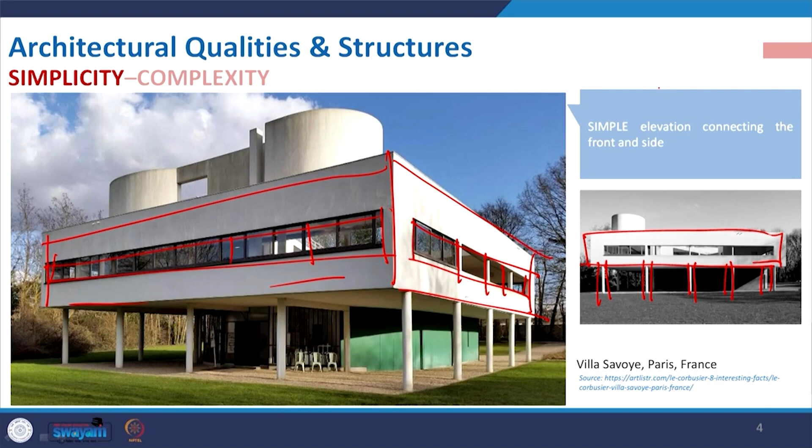Going back to the earlier picture, this is one example, not a very high rise structure, it's like a 2-story structure, where you maintain the simplicity in quality with similar elevational treatment from the front and all the sides. Here we have seen a high rise building, but with vertical and horizontal lines, it creates a simplicity quality of architecture.

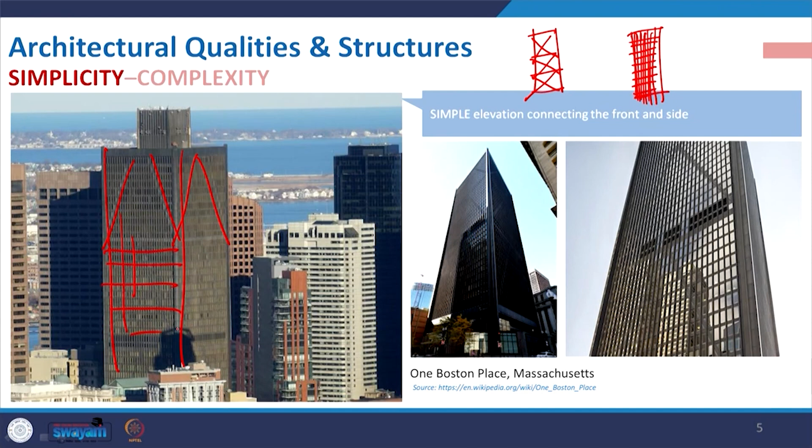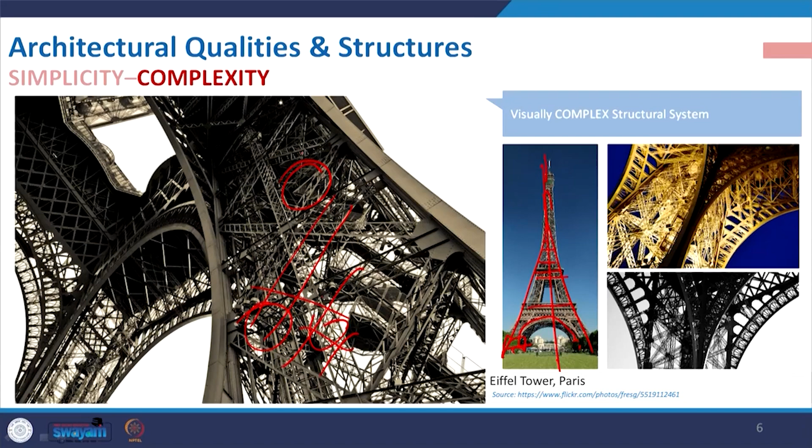This is also important - sometimes we put this complexity into the structural element to create something. We can refer back to the chaos concept that we discussed in the previous lecture, lecture number 2. So, this is one example of the complexity.

Before I go to a few slides taking reference from different studies, let us guess what exactly will be there. So, what is open and what is closed? Open quality architecture means where you experience some openness. It need not be open to the sky, but you make the structure light, or in such a manner that you create transparency, so that you can connect with the external environment.

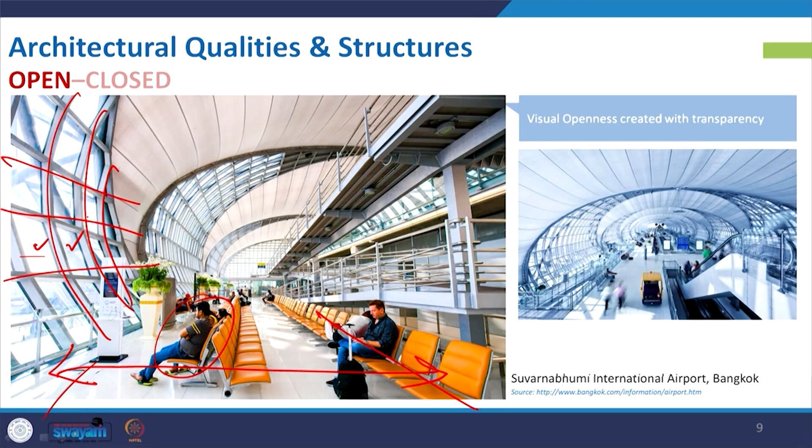At the same time, when you are inside, you can still get connected with the environment, with the outside environment. So that is sometimes encouraging, you feel very much comfortable, very much secure, that you can connect with the external, with everything that is going on outside, what is happening outside.

So this is another architectural quality leading to openness, but to create it in both examples, the previous one and this one, the common thing is the use of some steel members which create some void, and we fill it up with some transparent material. So this is helping us create this kind of open quality, the openness of the architecture, and the supporting structure should be like that.

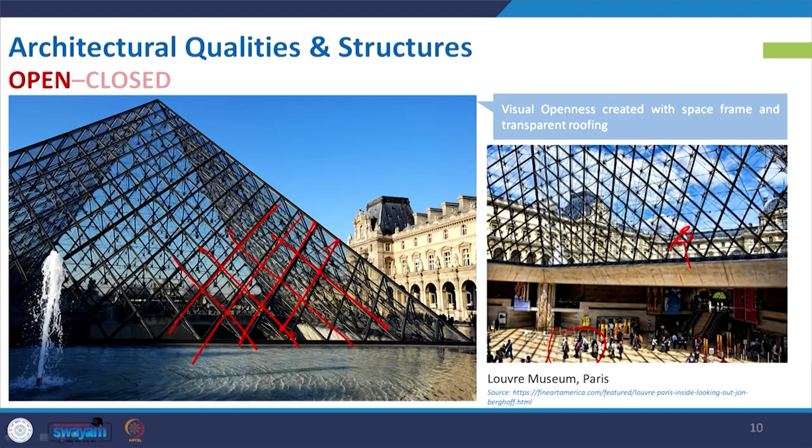Now, take the example of our residential building, a bedroom, a typical bedroom. So we have this opening on this side and maybe the door, for our region. So maybe we have a window for cross ventilation and all, we have visual connection.

Now, in some buildings, maybe this is a dining area, you make it full glass or very transparent, so that you can get connected. So for both cases the use of structural elements will be different, to make it stable and create this environment to get connected with the surroundings, making it an open or closed form.

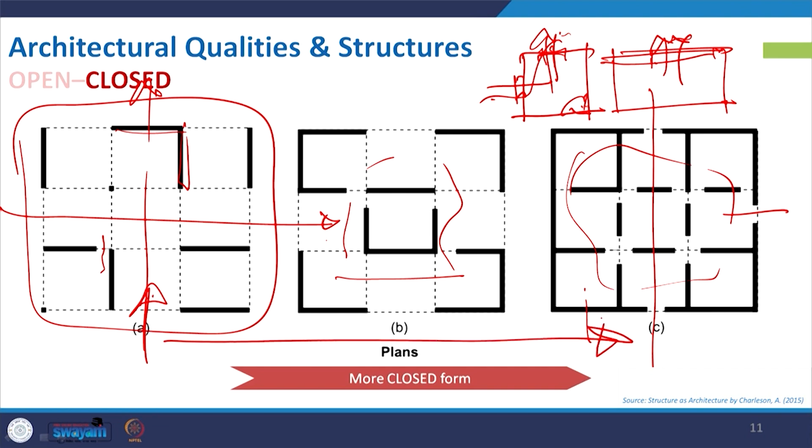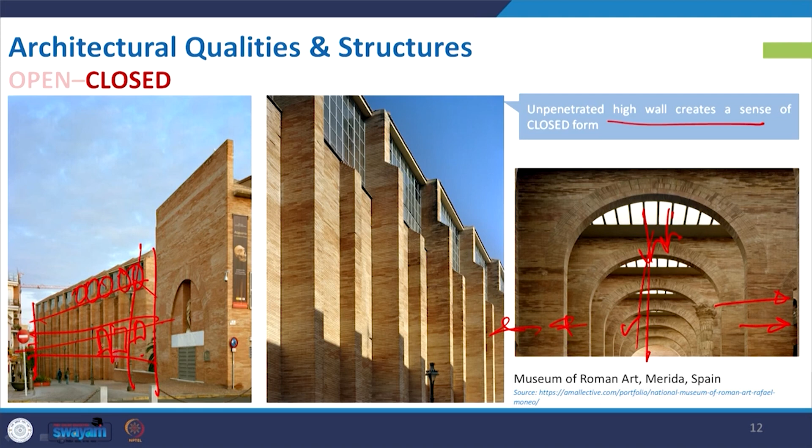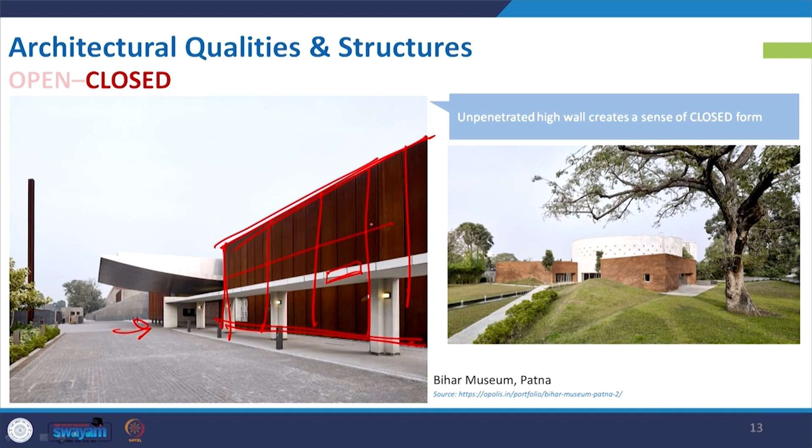It is creating a very contrasting architecture, but overall in the quality category, it is again a closed form, although they have a very nice environment inside, but from outside it is looking very closed. So for museum, the previous one from Spain and this example from India, Patna. Here the structure is being made with this. To make this closed form architecture, the structural application will be different because of the span, and when we have to create some punctures, all this load calculation will differ, because the moment you create some puncture in the surface or the wall, the material used, whether glass or wood as window, the calculation will change. So we have to see what is required and what type of quality to come up with.

Now, move to the lightweight and heavy. Again, I am saying this lightweight or heavy does not mean the physical weight of the structure. Definitely when architecture looks very lightweight, the overall physical weight will be comparatively less, but here it is the visual lightweight or heaviness of the building.

So say, for example, if I just want to make a door, I can just create some arch of brick and make it supported. This is one with a very simple form. This is another, the same, but I make it with a huge support, and instead of considerably small thickness, I create it large to make it grand, or add ornamentation where the thickness is much higher than the small one. This will make it literally heavy, or if you create more detail into it, add some elements, that will make it visually heavy, whereas the simple, sleek one is considerably lightweight.

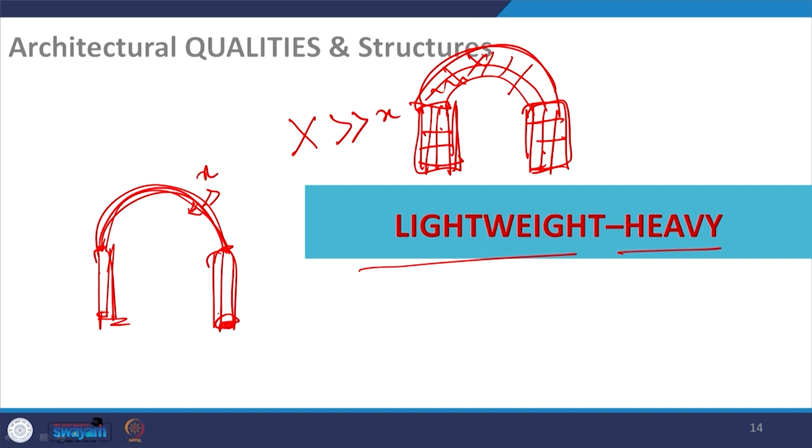Now move to the example. This is from the airport mostly, and you will also get many examples for airports, because the airport deals with so many passengers. Movement of passengers is the basic principle, how they can facilitate passengers and make an environment which will be very comfortable to them. So they create the space, and that should be obstruction free, one can connect with other, everything should be visible.

So for that we should go for a column free space, these are the transitional spaces, and we only use those heavy structures or piers to support it where it is required. Otherwise, we have to make the roofing very much light. For that truss can be used, space frame can be used. These are the structural elements where small dimension or small cross section of iron members can hold this, and along with that advantage, you can create a translucent environment which will allow light to pass on, so that you can also maximize the daylight use. So it makes this structure very light.

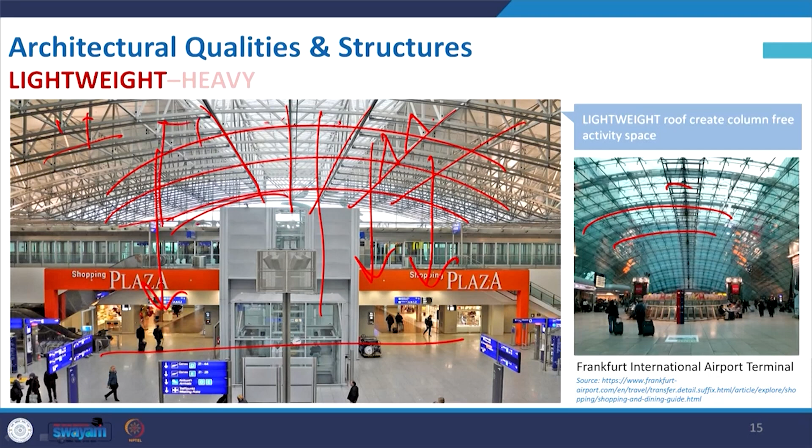Even with this huge span, look into the roof, it is looking very transparent, and only few members are just holding the load, the space frame and all, similar to this one also. So you just have a feel that the structure is very light, visually light, may not be light the way we think - if you add all the load, it will be substantial, but visually we can say it is light. This is only possible when you create this kind of roofing with the truss, and you do not have further use of it, because the moment you want to make it multi-story, this kind of structural roofing will not be possible, and that time you have to face a very hard type of ceiling on top of you. So this is possible here, and normally for airports these are being used.

So this is one example for the lightweight quality, and now this is very important for a stadium, the huge area to be covered up for the spectators, to protect them from unwanted weather situations. It may be scorching heat or it may be rain. So for that there has to be protection, and the main principle is that any spectator sitting anywhere in that stadium should enjoy the match going on, or any sport going on in the field, clearly.

We cannot have a heavy column structure to support the roof, so that is the constraint. In order to overcome that, we should think of some light structure. This is possible with some membrane structure. So what is membrane structure? Basically, membrane is a very thin sheet, it may be made of rubber or cloth, and it is to be supported with a minimal structural element.

Here you can see there are some piers outside, just attached to the stadium, where these members are cabled. This is a tensile cable structure, and we will discuss exactly what that is. It holds material which allows light to come through but also protects from the elements. Looking at this, it definitely feels like a very light structure. So transparency also plays a crucial role in the visual perception of lightness. A lightweight roof structure creates column-free activity space, which is essential, not only in stadiums.

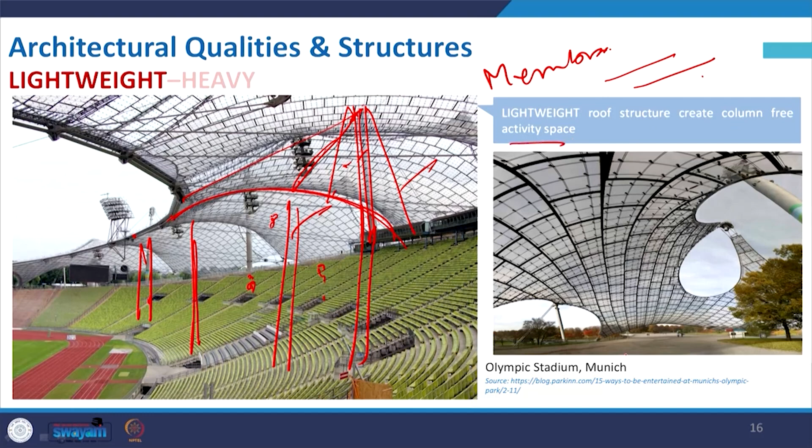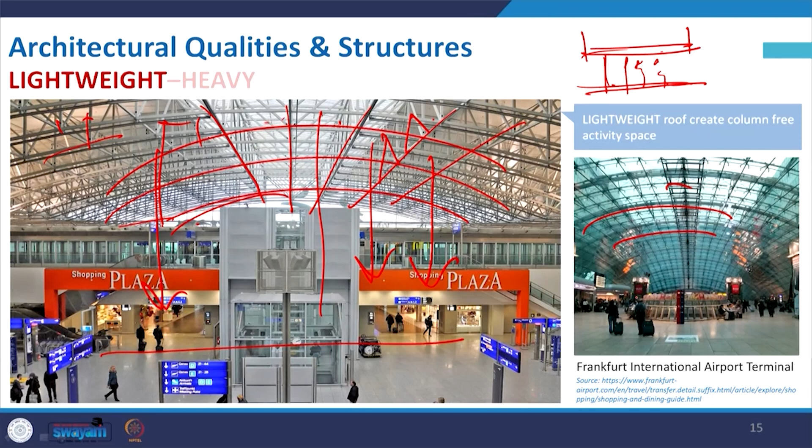In the same Olympic stadium in Munich, they have created a similar kind of arrangement for the entrance gate. Again, this is under the same category of lightweight. Of the two examples, one is from an airport and the next is a stadium. So if you go to any stadium, you can see it.

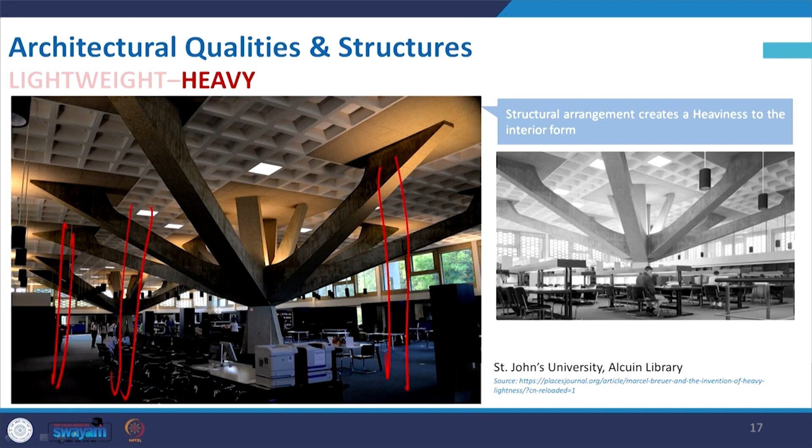Now let us come to heaviness. This is St. John's University Alcuin Library. Here, if you see, there is no regular obstruction, because again it is being created, but this is basically a structure which looks very heavy. It's like the branches of a tree holding up the roof. So instead of having regular obstructions, one has created this kind of structure, but inside, if you look into it, it looks very heavy and very congested.

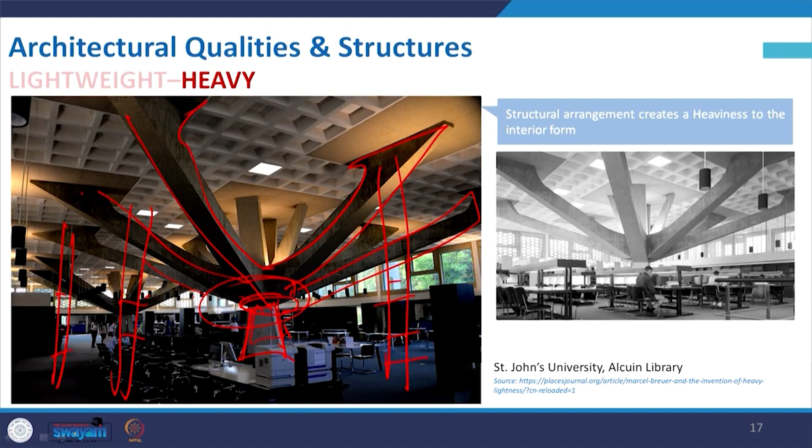So congestion and the feeling of heaviness are closely related. This structure is one example of heaviness, and with the material used, the concrete and all, where you have a large cross section, we actually perceive it as very heavy.

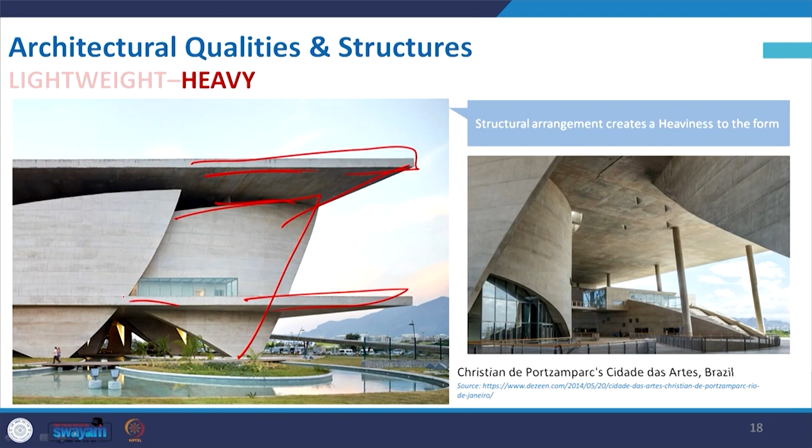Moving to the next example, here also, if you see this example from Brazil, this is again in the area of the art form. A huge concrete structure that looks very simple. If you say this example falls into simplicity, yes, it is not very complex, but having this mass, this heavy wall of concrete, creates a sense of heaviness. In these two examples, one is the library, where the supporting piers with different branches holding the roof create a sense of heaviness, and this one is itself those elements creating the architectural quality under the category of heaviness.

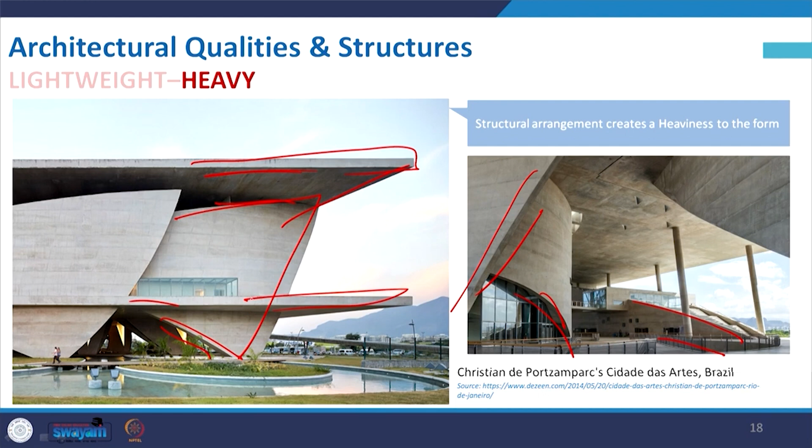Now move to soft and hard. Already I mentioned that soft does not mean the material used in the building is very soft in nature, or hard is a very hard material. So let us look at this.

This is one example, Tama Art University in Japan. If you see the plan, it is something like this, where the plan is curved and in elevation also it is curved. So double curvature creates a softness, because whenever we draw any curved line, it represents softness, it symbolizes a wave, a flow. Whenever we go for a straight line, it represents hardness in that concept. So here it is very smooth and soft, and these arches, even the interior of this space, have multiple curvatures in the plan, even in the arrangement of the furniture. Altogether it shows a soft flow. So curved structure, both in plan and elevation, with subtle geometric irregularity, creates flowing softness both in exterior and interior space.

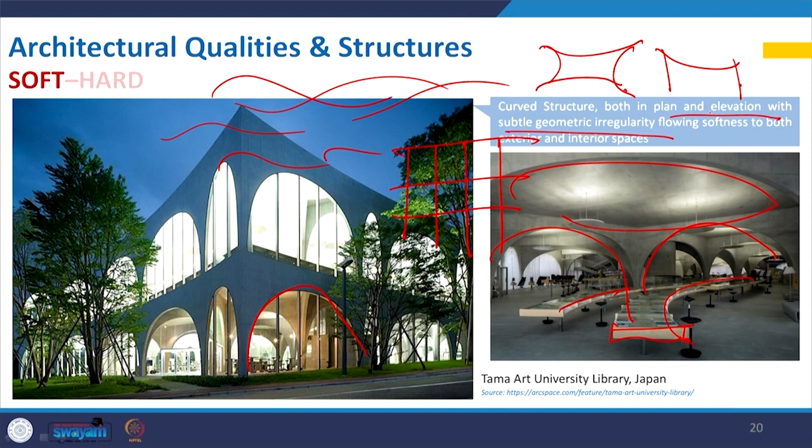I think I do not need to say much about this, it is a nice example of a flowing wave. This is an apartment building in Denmark, where the roof is created in such a manner that it looks very soft. Again, I am mentioning that this softness is not about the material quality, it is the visual softness.

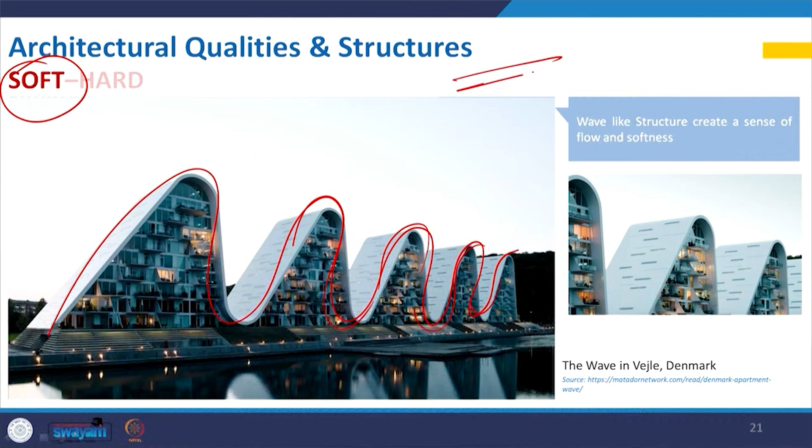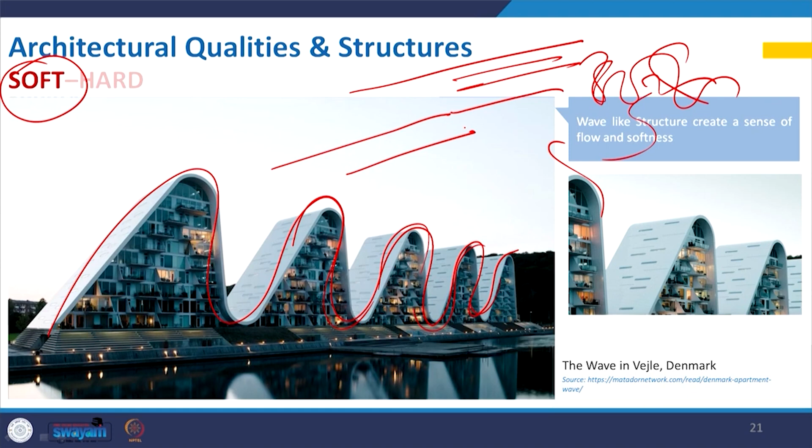So here we can easily make this, and it happens sometimes when we are unintentionally or in a subconscious mind, when we play with the pen, instead of making a straight line, we just make something like this. So this is the softness, and when you make a bold line, it represents the hardness. So we move from hardness to softness.

Back to back, this is a flow, and here it is something very bold, like an arrangement of stones placed together with a minimalistic form, heavy thickness, and the material used - stone type. So this is giving an example of hardness in architecture.

This is also an important, nice example - the Holy Redeemer Church in Spain, and people do appreciate it, it's had good reviews in architectural forums.

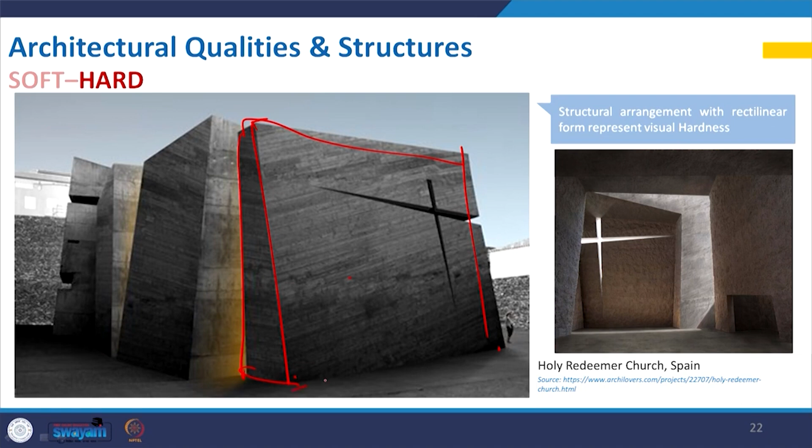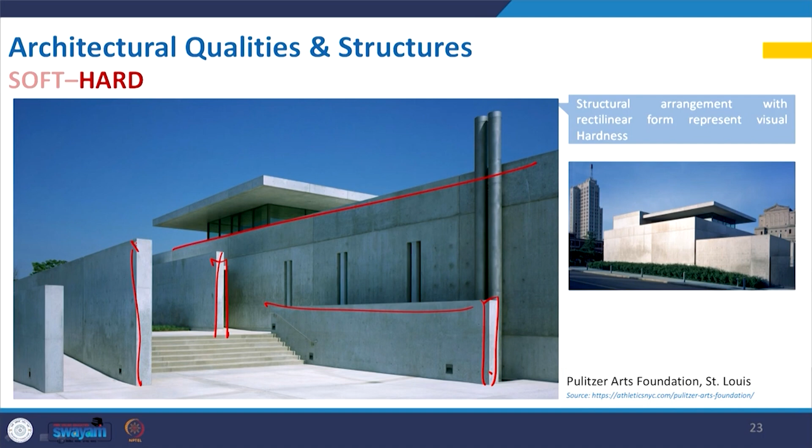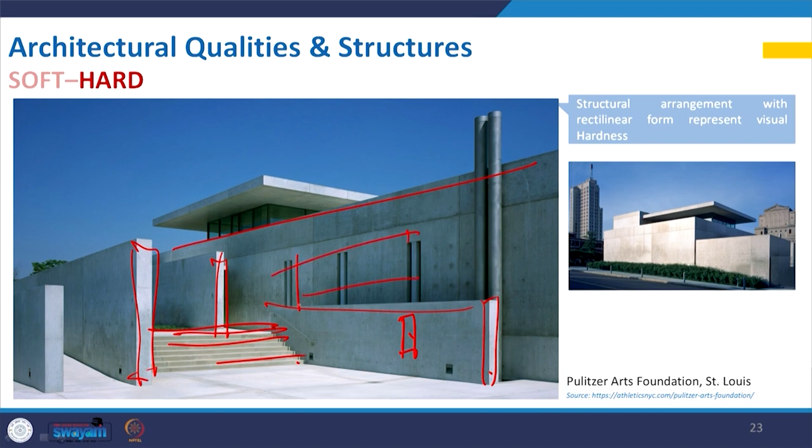And then this is really one example of the hard quality - that is so true. This is another art foundation. Here also, as already mentioned, very straight lines and use of this concrete structure placed in form gives a visual sense of hardness. No openings or visual connection with the outside - this surface is one example of hardness.

Now we are moving to the last pair of qualities, that is elegant and rough. Elegant is defined as very perfect, very smooth or very sophisticated, while rough is something like very brute. So let's look at some things we create.

For example, if you see any Gothic architecture or something, there is small creation, small ornamentation to the structure - that's a piece of elegance. Roughness is where it leads to the deconstruction concept in architecture.

So let's clarify this concept a bit with an example. This is one of my favorite examples, designed by Felix Candela - the oceanographic building. So here, why did I put it in the elegant category?

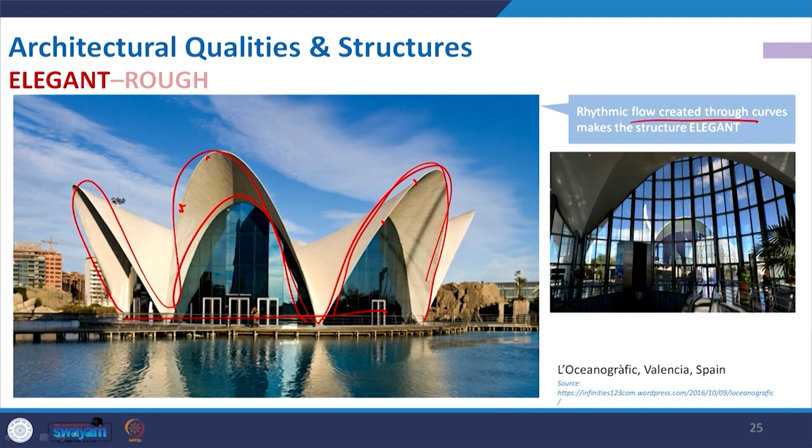This is a very good curvilinear form of architecture where parabolic, hyperbolic paraboloid forms are being used, and Felix Candela is good at that. So it's perfectly executed - the thickness, the petal form, the shell form - created very accurately, even from inside. This gives elegance, an elegant experience to the users. The rhythmic flow created through curves makes the structure very elegant.

Now this is another example, a terminal building again from India - this is Mumbai International Airport. This is the entrance, and the beauty is in this particular transition.

Smooth transition of column and roof with different elements creates something very elegant, very beautifully done, with small solid-void, shade and light. So basically the overall ambience gives a sense of elegant quality of architecture, and it's possible through the structure - for the purpose of the airport, this is a huge span.

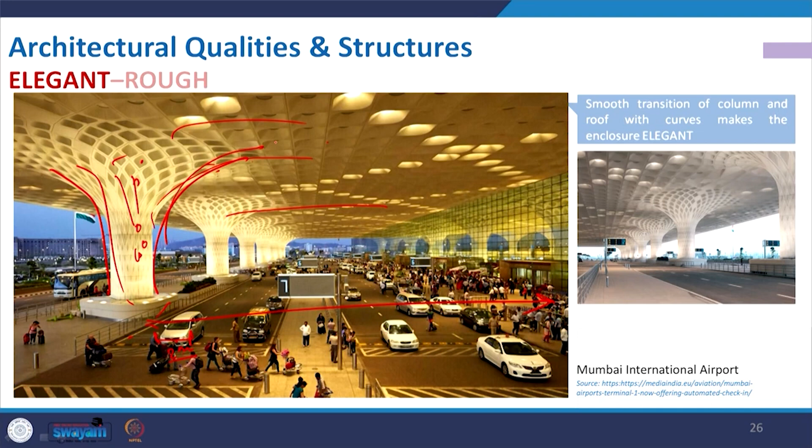To get some idea, this is a car, maybe less than 2 meters, and you can place it there - so this is a huge span being supported, and this particular smooth transition is what makes this piece very elegant.

Now come to the rough. A rough structure can be created intentionally, the way we put it. It may not be the result of ignorance during construction, where somebody just left the job half done and that's why the outcome is that way - intentionally it may be created to create some contrast.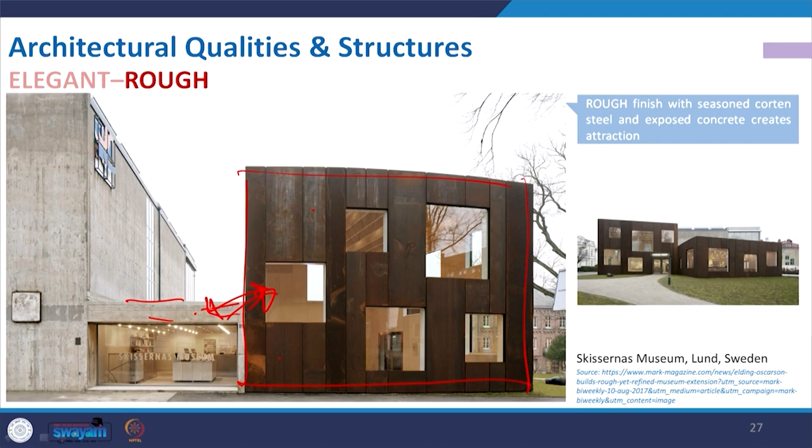It is making a composition and creating the contrast between two particular colors, which we sometimes talk about in architecture, creating this rough quality while maintaining the stability and durability of the structure.

Let us take the last example in the rough category, the seashore library, which is again a concrete structure. If you see the roof, it is finished very rough, and the cladding has been done giving an exposed finish. When you put wooden shuttering, it puts some impression on the concrete without plastering, giving a rough finish.

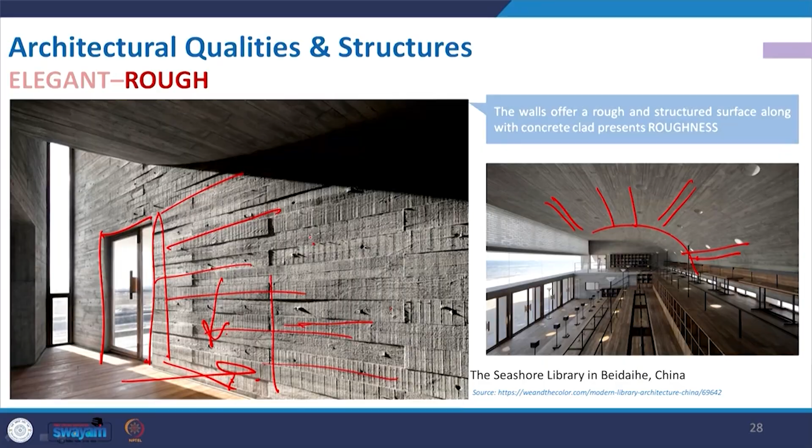So we appreciate this kind of thing in some cases. It is definitely not compromising quality or done for cost cutting instead of having a beautiful finish. The rough quality can be maintained, but to achieve it we have to be choosy about the structural material we use to create it. We cannot create it with all materials available to us, so we have to be choosy when to make it rough, elegant, or smooth.

Coming to the summary, we summarize this particular lecture. In this we learned about architectural quality, and suitable selection is very important.

It is essential to bring the architectural visual quality into reality. If we want the quality of open form, then it should be very light and supported, not only by the structural element but also structural material, as I mentioned in the last two slides, like corten steel, which is strong enough to make it stable while also creating some rough finish.

So structural material is another important part in creating the visual quality, whether it is making it rough or otherwise. We have to know about the materials, and we will cover that aspect in some of the lectures.

Most importantly, the overall arrangement should solve the purpose. When we think of quality, quality will come, but before that it should solve the purpose. If the requirement is to create a column-free area, that is a constraint, and the available options that cannot be used, we have to discard.

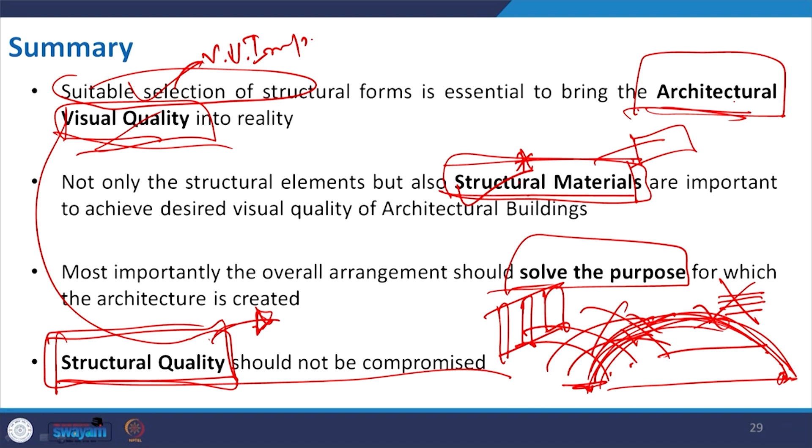So this is the overall understanding. With lectures 2 and 3 we learned about different architectural concepts and architectural qualities, and their association with the type of structure that supports this concept and quality, having a relation. The relationship to the architectural building is justified with that, and from time to time we will also discuss more examples in different contexts.

Next we will discuss in lecture number 4 the different kinds of loads on structure. I have briefly mentioned different kinds of loads, but we will discuss in detail in that lecture. Thank you all for taking part in this. Thank you.